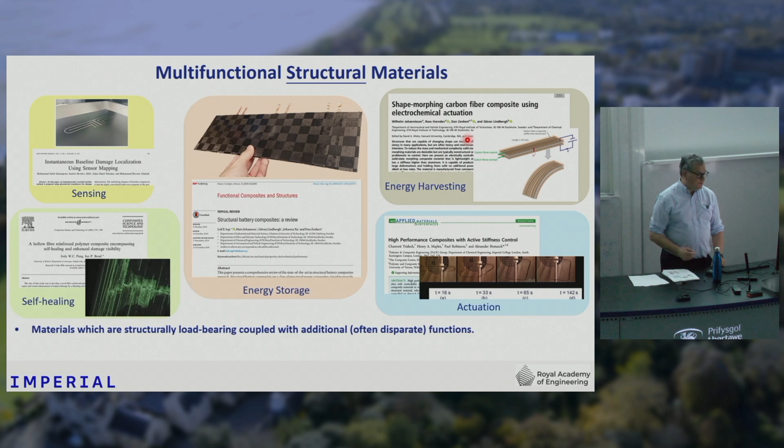What I ought to reinforce first is that we're really going beyond this idea of smart materials and smart structures. There's a lot of work that's been going on for decades embedding sensors or batteries into structures. For instance, this is some really nice work done by the US Navy, going on for about 15 years, looking at embedding lithium-ion batteries into aircraft structures - these are UAVs - as a way of making more efficient structures.

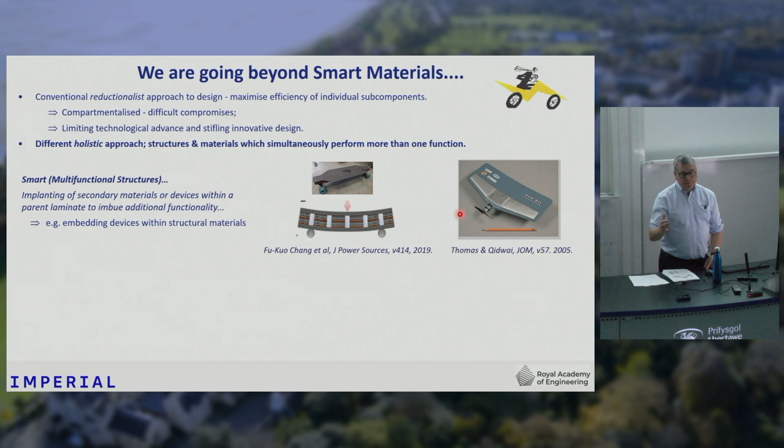So this idea of embedding devices, embedding batteries into a composite structure, is actually relatively mature. But what we're doing is really going beyond that. We're not trying to embed a structure, we're not assembling a product out of a monofunctional structure and a monofunctional battery - we're actually trying to imbue the same material to do two things simultaneously.

For instance, the carbon fibers that we use within our material carry structural loads - these are aerospace grade carbon fibers. But those same carbon fibers have lithium ions intercalating into them and out of them to add a battery function. So the technology and the challenges with this are much more immense than for just embedding a battery, for instance.

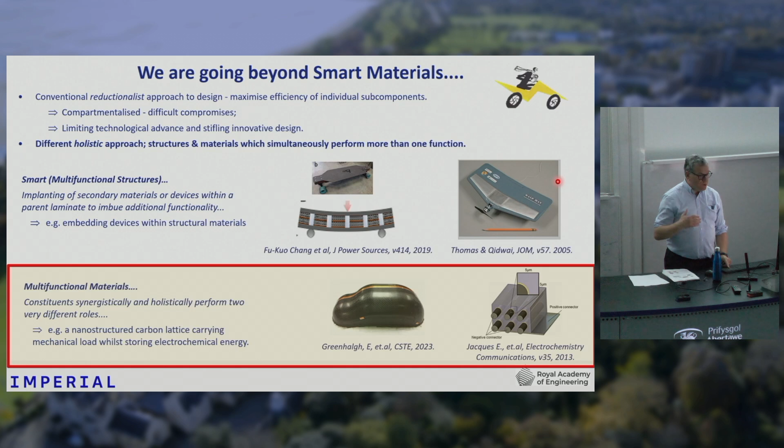But the rewards from doing this are enormous, and I'm going to elaborate on that in a minute in terms of what achieving this idea of structural power materials is going to mean for our day-to-day lives. But to give some context to what's really driven us this way is this whole issue of sustainability, and the issue of energy storage and electrification of transport.

So if you're looking at an electric car, the issue you have is that you have a car with a number of batteries in it, but you need to put more and more batteries in to actually improve the range of the vehicle. But adding more batteries adds more mass, so you need even more batteries to do that particular journey.

If you want to double the range of the vehicle, you can achieve that with the same amount of energy by halving the weight of the vehicle. So things like Tesla cars, for instance, about 25% of the weight of the car is actually the batteries. So you're expending 25% of your energy just moving the batteries from A to B, which isn't very efficient.

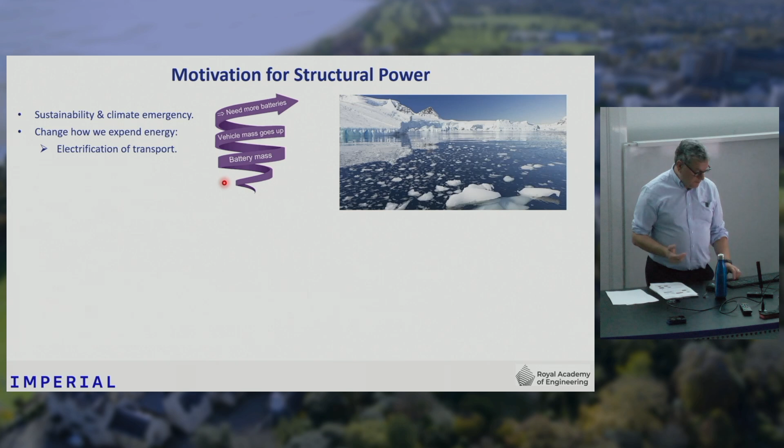It's parasitic weight. In aerospace, this is even more of a problem. There's been a really big drive in aerospace toward a net zero aircraft, a long-haul passenger plane that's not using any aviation fuel by 2050. The challenge is that if you're using kerosene in an aircraft, about 30 kilograms of kerosene is required for each passenger.

If we use batteries with current battery technologies, which have an energy density of about 250 watt-hours per kilogram, you'd need 1,000 kilograms of batteries per passenger. So that's really just not feasible.

Aerospace is a very conservative industry. If you try to get a new material onto an aircraft, you have to go through a lot of steps to demonstrate that it's airworthy. So really, we felt that we need a radically different approach to how we store electrical energy on vehicles.

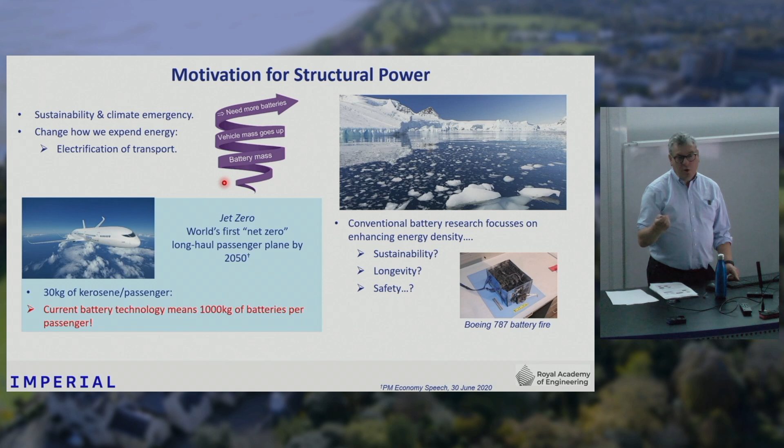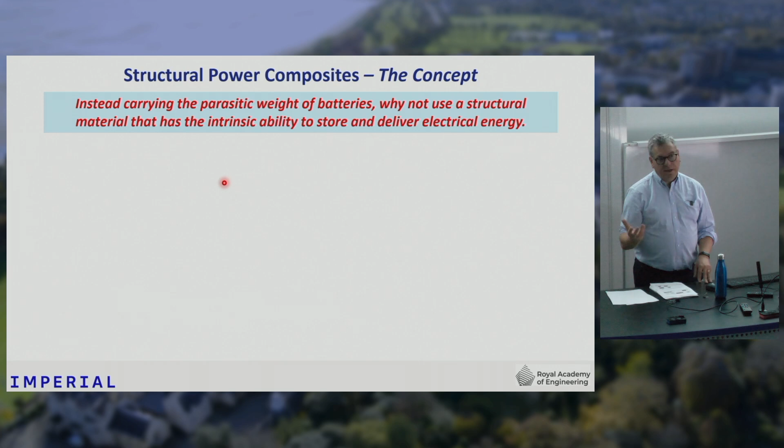Instead of having that parasitic weight of the battery, why not use the structural material to have an intrinsic ability to also store the energy? So you won't need batteries—the body of your car, the casing of your phone, would store the energy that you need for use.

We worked very early with Volvo on this concept, and they were very keen on this idea, and we've gone on to demonstrate that this technology is feasible. There's a lot of synergies here in terms of the sciences.

Although we're bringing together electrochemistry and composite mechanics, which are very different fields, there's a lot of parallels. For instance, in electrical energy storage, carbon is widely used as one of the electrodes, or both electrodes in some instances. And in structural applications, we use carbon fibers. So immediately there's some synergy there.

There's also this issue that carbon fiber composites that we use in aircraft structures are laminated structures, while batteries, again, are laminated structures. So we thought there's some synergies there that we could try and exploit with this technology.

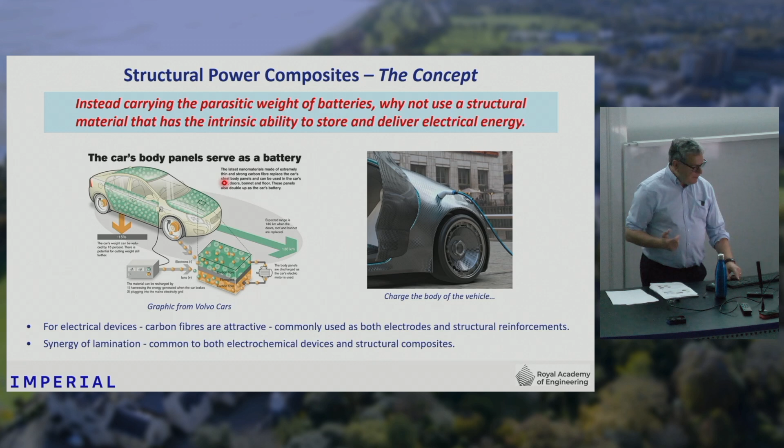So let me share with you our aspiration for what we hope this technology will achieve. First of all, as with any sort of lightweighting technology, the idea that you could have a material that does two things simultaneously is going to give us lighter vehicles, more spacious vehicles. So what we're trying to convey here is that you no longer need this big pack of batteries in the car—there's a lot more space in the vehicle.

So what we're showing here is you're charging the vehicle. In lots of applications, this is going to give us lighter weight, reduced volume, more spacious applications. But we thought there are things here that this technology is going to offer beyond those conventional things we think about in engineering.

One aspect we recognized is that a lot of products, particularly portable electronics, have their actual form factor dictated by the battery. In a phone, for instance, half the volume of your phone is the battery. So if we could now get rid of the battery...

...and use the casing of the phone, which is a structural component, but imbue that with the capacity to store energy, you could now have phones as thin as credit cards because you no longer have to think about where you put the battery. That was something we thought would be very attractive from a consumer point of view—suddenly it opens up this space where you can make very slender devices.

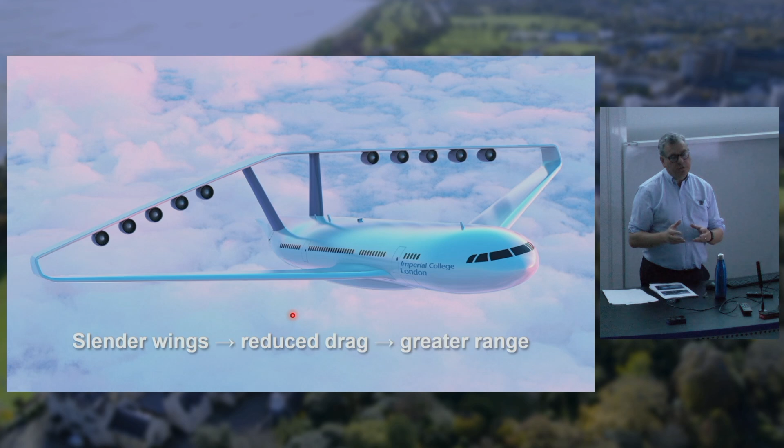As an aerospace person, I was immediately thinking about what we can do in aerospace with this. Where we started was recognizing that at the moment aircraft have hollow wings, and the reason is you need to store fuel there, be it kerosene or batteries. But if the structure of the wing itself or the fuselage stored the energy, you wouldn't have to have hollow wings anymore. You could go to very thin wings, reduce drag, and improve the efficiency of the vehicle. But if you start moving to thin-winged aircraft, you run into aeroelasticity problems.

So the whole aircraft would need to look different. You'd have to start looking at box wing type configurations, for instance. One thing we recognized with this technology is that it's not something we can just retrofit onto an existing product. This needs a blank sheet of paper. It's such a fundamentally different way of using structural materials that you have to rethink everything from scratch.

As we thought about how we could use these materials, we saw that it offers localization of power storage, energy storage. Rather than having the power source remote from the actual usage, you have an opportunity to bring everything closer together. For instance, in the aircraft cabin, when you're sitting watching your entertainment screen, the energy driving that is actually coming from the engines of the aircraft. And if you took away the panels in an aircraft, you'd see enormous looms of wiring.

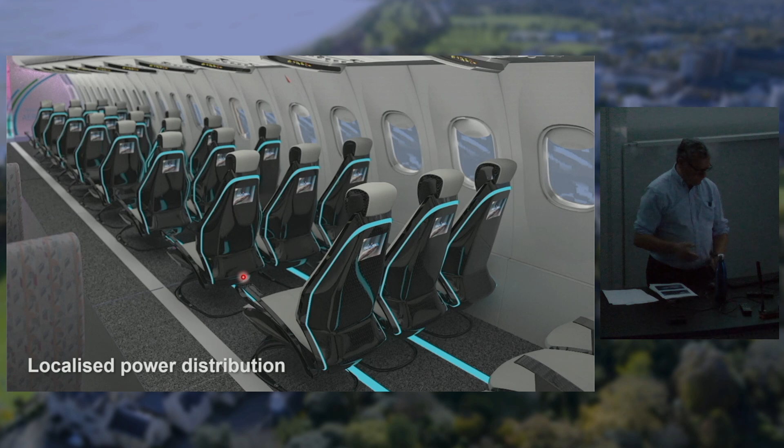In the wider context, we started thinking about how this could go beyond transportation - one thing we thought about was infrastructure. If you're looking at using solar panels on your house, at the moment you have to have a great big bank of lead acid batteries in your basement to store all that energy. But what if you actually made the bricks of your house into batteries? The walls of the building would actually store the energy captured by the solar panels. This is where we saw this technology going.

So this is all the aspiration - we're nowhere near achieving these things yet, but we're trying to think about where this technology could take us if we overcome the challenges. And I'm going to talk a lot about what those challenges are.

So let me focus on that cabin application I spoke about. This is a paper we published 2 or 3 years ago where we looked at an A220 aircraft, considering using the floor panels to store energy. We started to think about what levels of performance we could achieve in the next 5 years or so.

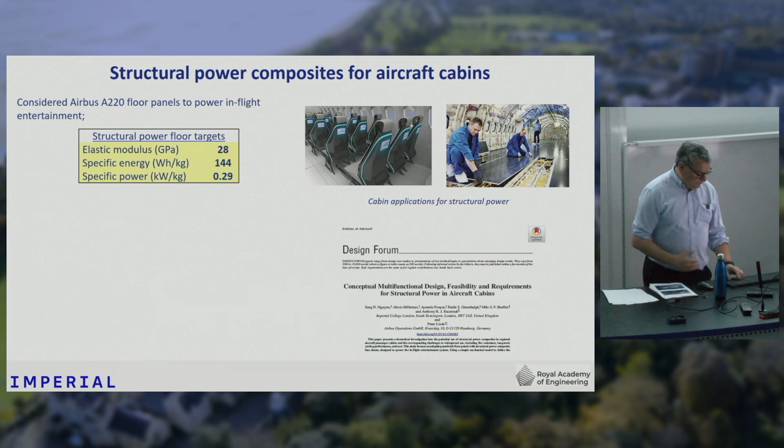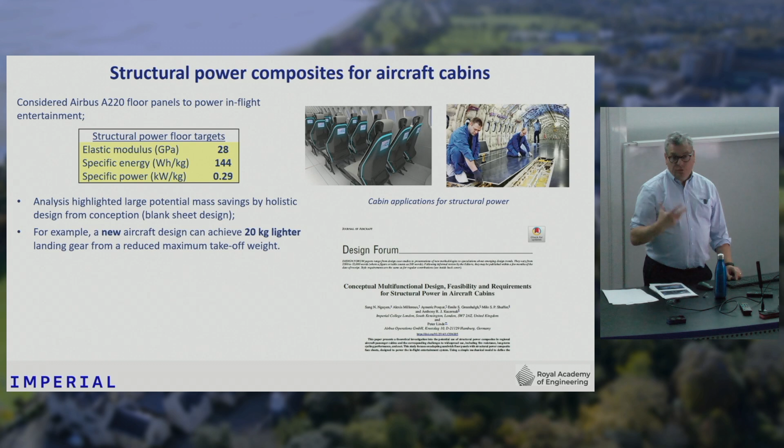Taking those numbers, we started redesigning the cabin, looked at all the electrical systems and demands on that system, and identified that if we took an A220 and put this system into the vehicle using those performance targets, we'd get a weight saving of 260 kilograms per aircraft - equivalent to about 500 litres of space saved.

And we then translated that into CO2 reduction. For that vehicle, it would result in 280 tonnes per year of CO2 reduction, which is about equivalent to 1% of the annual CO2 emissions of a single A220 aircraft on its typical flight schedules. So this was very attractive, and we think cabins is one of the early adoption routes we see for this technology.

We've also done some other studies trying to understand how this technology could be applied to other areas in aerospace. What we've been trying to do here is identify the target performances we need to achieve in our materials to actually offer a benefit, and that's helping us identify what routes we need to take this technology.

So there's a lot of interest at the moment in these types of vehicle, these autonomous air taxis. The idea is you could take one of these air taxis to fly from City Airport, in the east of London, to Heathrow, in the west of London. If you took a taxi, that would probably take about 2 hours, but if you flew, it would take about 15 minutes. These air taxis hold about 4 people, they don't have a pilot, it's all autonomous. Various companies like Vertical Aerospace and Airbus are developing these types of vehicle.

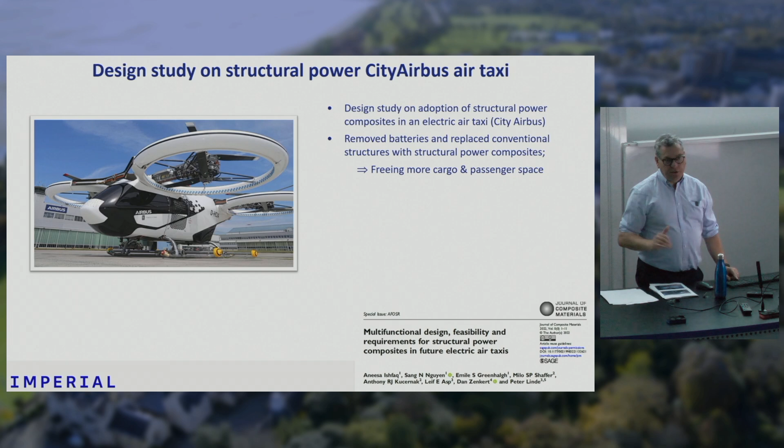To put that another way, if you want to fly from London to Manchester, which is 240 kilometres, conventional batteries would need an energy density of about 370 watt-hours per kilogram. That's not a level we're going to achieve in the next probably 5 or 10 years. For structural power material, you need less than half of that, 170 watt-hours per kilogram, which we haven't achieved yet, but it's within reach. So the attraction of this technology is that it will help us achieve electrification of transportation without needing the astronomically high energy densities we need for batteries to achieve that.

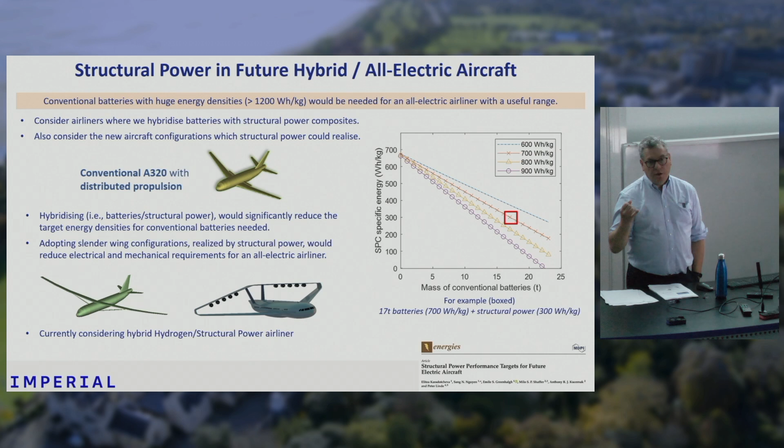So the idea, for instance, is that you'd have a hydrogen-powered propulsion aircraft that powers the engines, but then you'd use structural power materials to run the cabin and things like that.

but they are very sluggish because they work by chemistry. There's a chemical reaction going from charged to discharged, and so thermodynamics becomes very important for batteries. So although batteries can store a lot of energy, and fuel cells are even better in terms of how much energy they store, they're very slow at delivering that energy.

The other end of things are capacitors, so electrostatic capacitors, the sort of thing you might have used at school. Those deliver energy really quickly. They have a specific power on the order of 10 to the 5, 10 to the 6 watts per kilogram, but they can't store very much energy. So those capacitors tend to be used in things like energy weapons or lasers, where you want to deliver energy really quickly.

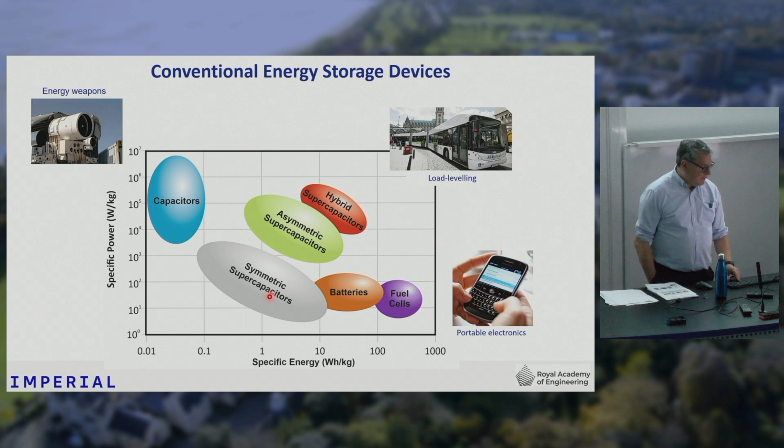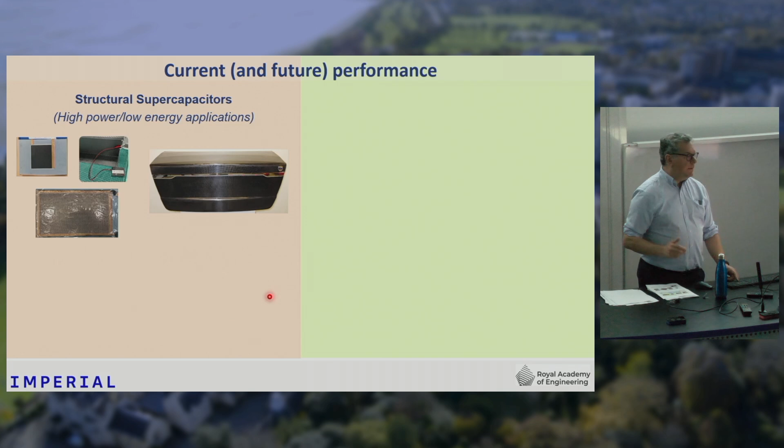So we focused on supercapacitors, and as you'll see, we've done a lot of development—we've taken this technology forward quite considerably. But while we were working on this, we started speaking to people in Sweden, at KTH and Chalmers, in Stockholm and Gothenburg, and they've started working on structural batteries.

So they're a little behind us, and they've started developing that type of technology. I'm going to focus on structural supercapacitors because it's what we're doing, but there's a lot of challenges associated with both these devices which is common to both. And so the things that we deliver with our technology are going to help the people in Sweden with their developments.

So just to give you an idea of where we are: a conventional supercapacitor will store about 5 watt-hours per kilogram and has a power density of about 5 to 10 kilowatts per kilogram. We're sitting at about 1.4 watt-hours per kilogram and 1.1 kilowatts per kilogram.

So we're not as good as a conventional supercapacitor, but we have a material that you can build a table out of, for instance, which you can't do with conventional batteries or supercapacitors. This is where we expect to get to over the next few years, pushing up the power and energy density, but our material also has mechanical properties.

So this is the Young's modulus and shear modulus of our material, and it's getting towards what you get for a conventional composite. The battery technology has much higher energy density—they're currently at 45 watt-hours per kilogram. If you remember, a conventional lithium-ion battery is 250 watt-hours per kilogram, but this is increasing rapidly.

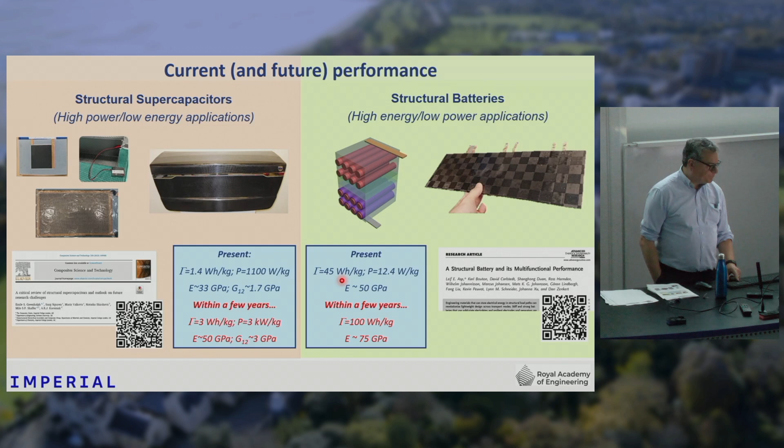So let me explain a bit about how our devices are assembled. Essentially, for a conventional supercapacitor, you have two plates which have very high surface area, and those are electrically conductive. Then you have a separator layer which is electrically insulative but allows ions to move through the material.

Between those two plates you have an electrolyte, consisting of a liquid that has ions in it—cations and anions. When you charge the device, you force one set of charges to move to the positive plate, the other set to move to the negative plate, forming what's known as a double layer. Because you've got very high surface area and the charges are very close together, you get very high energy storage compared to a conventional electrostatic capacitor. So that's a conventional supercapacitor.

What we've done is we've taken carbon fiber fabrics, and we've recognized that carbon fibers don't have very much surface area, so we've done stuff to them to increase the surface area—I'll talk a bit about that in a minute. We have current collectors, because although carbon is electrically conductive, it's not as good as something like copper or aluminium, so we have to put a current collector on there to help with that.

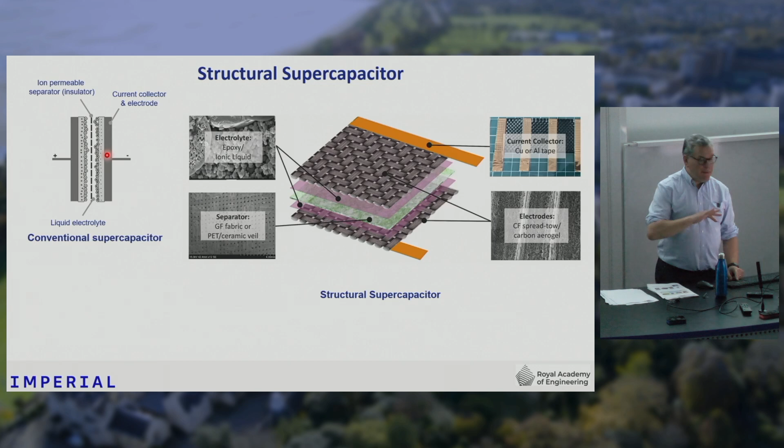And then we have a separator layer, which is either a glass fiber fabric or some sort of non-woven ceramic veil. And so that allows us to produce the devices.

So let me talk a bit about the difference between supercapacitors and batteries and sort of explain the different research challenges associated with those.

Supercapacitors we felt were a more low-hanging fruit in terms of this whole idea of structural power. There were some big challenges with batteries that we were worried about.

Supercapacitors, you tend to use them where you want high, rapid delivery of energy. So things like if you suddenly lose power in your laptop, there's a supercapacitor that kicks in and provides an emergency power source to power down your computer. It can be used for capturing energy, like regenerative braking, things like that.

So it's a technology that's not as big as battery technology, but it's certainly a stepping stone towards what we're trying to achieve. So giving you a comparison,

Lithium-ion batteries give high energy but low power. Supercapacitors are the other way around, low energy, high power.

As we're all familiar with conventional batteries in your phone, they have a limited cycle life. Your batteries die after a few years' use. A lithium-ion battery is on the order of 1,000 cycles. And that's because you're essentially doing some chemistry - when you charge and discharge, you're actually changing the chemistry of your material.

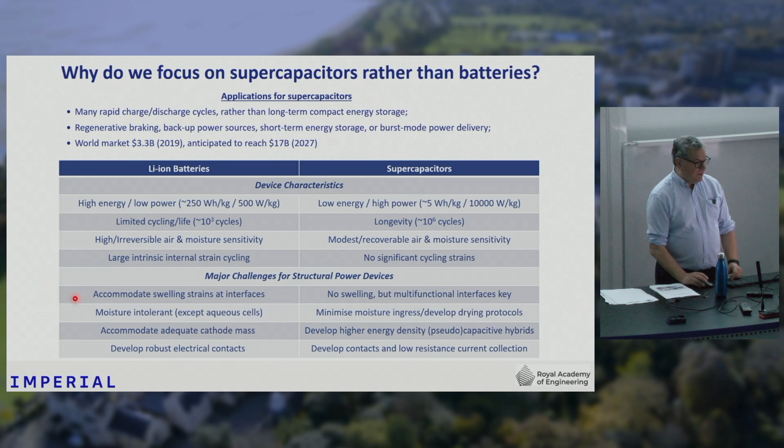So in terms of research challenges, those charging issues - in batteries, the swelling and contraction you get are going to offer challenges in terms of managing the strains that can develop in the material and potential damage that's induced.

But for supercapacitors, that swelling is not a problem, but the interfaces that we develop - and I'll talk a bit about that in a minute - those become important.

Batteries are very moisture intolerant, while it's less of an issue for supercapacitors. So what becomes the research challenge in batteries is actually having enough active material in the device, while for supercapacitors, we're trying to find ways of getting higher energy densities in the material.

In batteries, you're looking at having robust electrical contacts, but in supercapacitors, because everything's driven by how quickly you can deliver the energy, then the electrical resistance of the material becomes really important. And so what we're striving to do with supercapacitors is reduce the electrical losses in the current collection.

So I'm now going to talk about the different themes of the research that we're doing.

And in developing this research field, the nice thing about working in this area is that there's a huge amount to be done. We're not filling in gaps, as with often conventional research areas. We've got this whole empty field that we're trying to build up.

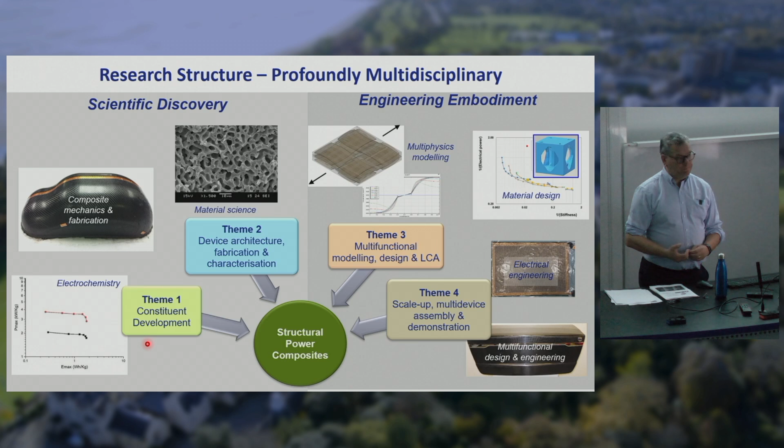Before I talk about those themes, I just want to flag up a paper that we recently published, I think it was last year, where we looked at all the literature on this area. This really gave us a lot of insights that I'm going to touch on as we talk through the presentation.

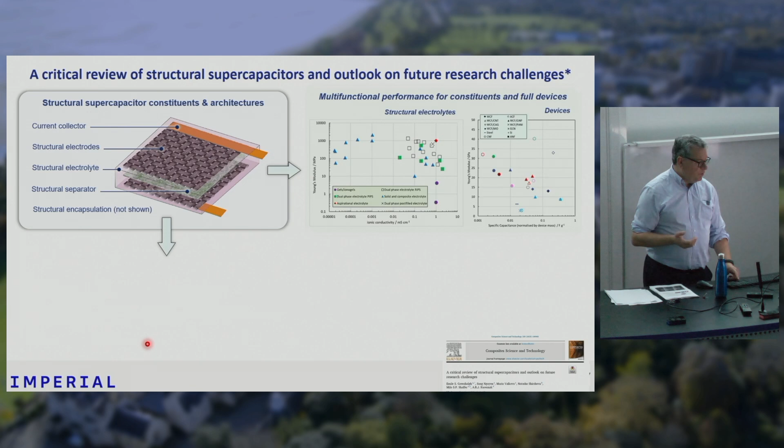We looked at all the literature that was out there in terms of performance of the electrolytes and the devices, so this is looking at capacitance against Young's modulus, for instance. We also looked at some of the engineering issues, like where are things with the modeling, where are things with current collection. That really came up with a series of recommendations for this technology that I'm going to be touching on as I go through these 4 different themes.

But to sort of help break this talk up, I thought maybe at this point I could field any questions you have on what I've covered so far, before I dive into the individual themes.

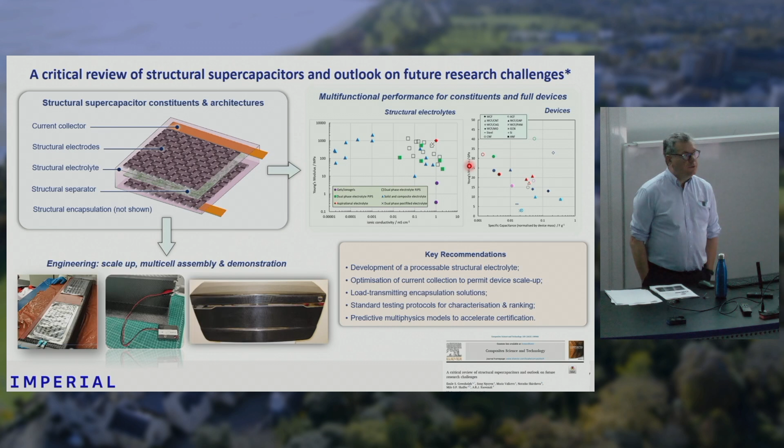So I was just wondering, obviously when you design a composite, there's normally a lot of rules in the design you have to follow to get the directional spread. There's also a lot of challenge when you make composites, they're quite fussy things to make. Does this sort of technology add significantly to those challenges?

It does, it does. Working in composites, we have to worry about balancing the layup. You choose a stacking sequence where you've got particular modulus, elastic requirements. You have to make sure the stacking sequence is mirrored at the midplane, and ensure you've got the same number of angle plies in the plus or minus direction, so you end up with a laminate with 0 B terms. So that's the mechanical aspect.

The problem with structural power materials is that they're also batteries or supercapacitors. A battery has an anode and cathode, which are different, so if we just stacked an anode, a separator, and a cathode, we'd have an unbalanced laminate. So we're starting to think about things like 3 electrode cells, where we have 2 anodes and a cathode in the middle. It's effectively 5 layers with the 2 separators as well, which isn't ever done in conventional batteries, but it's something we think we might have to do just to deal with those balancing rules.

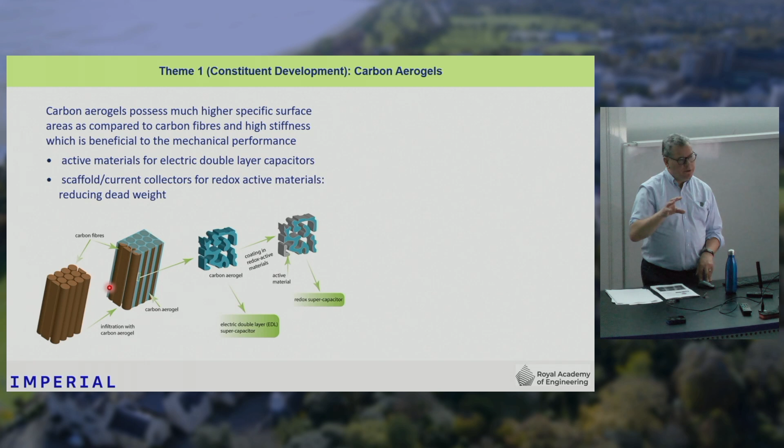But what we've really moved on to is carbon aerogels. To explain what carbon aerogels are, these are effectively amorphous nanocarbon foams. It's produced by infusing a precursor into the carbon fiber fabric, using conventional aerospace grade carbon fibers, then you pyrolyze that to turn it from a resin, effectively a phenolic resin, into a carbon aerogel. This image shows a carbon fiber about 7 microns thick, and the carbon aerogel within the matrix space between those layers.

Carbon aerogels are used widely in the conventional electrochemistry field for supercapacitors and even batteries. The problem is it's really brittle, but the nice thing about using carbon fibers is they act as a scaffold. So rather than having a powder, the carbon aerogel is supported by the carbon fibers, and we can produce laminates. I think the largest we produce is an A4 size laminate, which is continuous carbon fiber with a continuous aerogel throughout it.

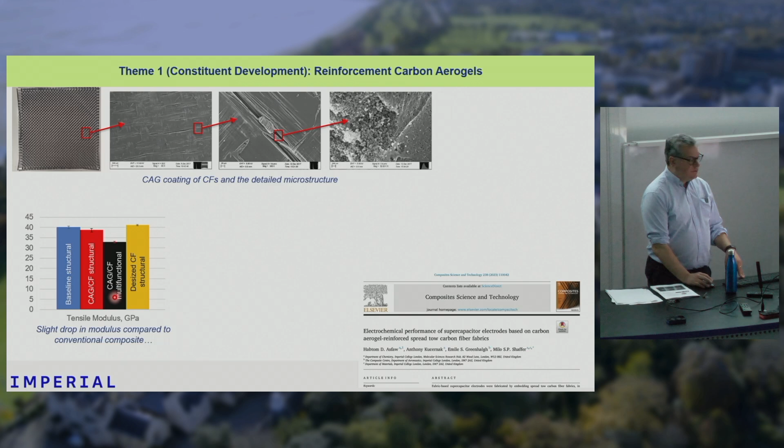This is a structural resin with carbon aerogel on the carbon fibers. We're maintaining the same mechanical properties, modulus. If we use the multifunctional matrix, we get a drop because the multifunctional matrix, as I'll show you, is much softer. And then we did a desized version as a sort of control.

However, the problem we've encountered, and which is what we're addressing at the moment, is that the carbon aerogel process damages the carbon fibers. So we're now exploring how we can get around that problem.

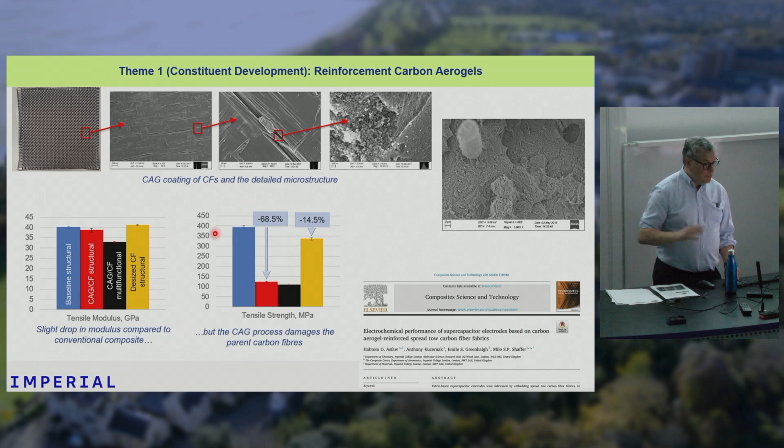So we do have other strategies for producing electrodes. We're looking at using carbon nanotubes, for instance, putting those onto the carbon fibers as a way of improving the electrode development. So I would say on the structural supercapacitors, the actual electrode development is quite advanced.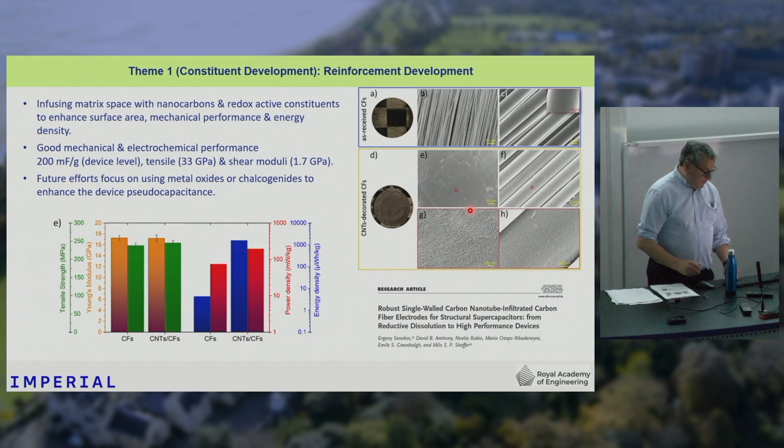But where the really big research challenge is, is on the electrolyte. The nice thing about the carbon aerogel is that we've identified it's actually stiffer than a conventional epoxy. The carbon aerogel has a modulus of about 25 gigapascals, while a conventional epoxy has a modulus of about 5 gigapascals.

So we actually think the aerogel could be used to enhance mechanical properties of the composite if we can get rid of this degradation problem. And so that synergy there between mechanical and electrochemical is really attractive. It offers us a way of actually getting this technology to go beyond just a rule of mixtures.

With the electrolyte, this is more challenging because we want a material that's mechanically good. It's rigid, so it can carry mechanical loads and transfer loads between the fibers, but it's got to allow the ions to flow between the fibers. Conventionally, electrolytes are soft, they're liquids or even gels, and they allow ions to flow. If you have a rigid material, it's difficult for those ions to move.

So the approach we've taken, and we have some aspirations in terms of performance we want to achieve. We want the Young's modulus of the electrolyte to be beyond a gigapascal, and we want the ionic conductivity to be beyond 1 millisiemens per centimetre.

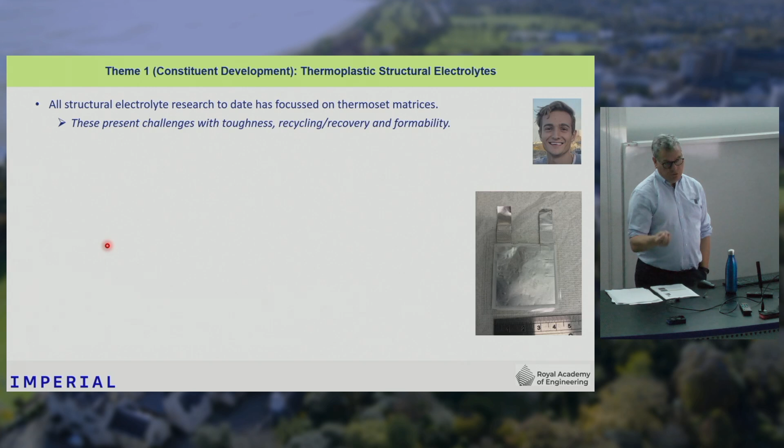The challenges here are that the processing temperatures for conventional high performance thermoplastics are enormous, 350 degrees C. So those high temperatures are going to be problematic in terms of producing a material which has functions, because a lot of those functions are going to be damaged by excursions into those temperatures. Producing that biphasic structure in a material that you're processing at those temperatures is also going to be very challenging.

And thermoplastics, although they're quite tough, they tend to be very difficult to bond things to them. Things like polyethylene is a thermoplastic that's notoriously difficult to bond things to. So if we want to assemble a device where the layers are bonded together, that's going to be challenging. So we have various strategies that we're looking at to try and achieve a thermoplastic structural electrolyte.

The main driver here is that thermoplastics can be processed quickly, so we could get this technology into applications where manufacturers want things made quickly, like portable electronics and automotive applications. It also means there's a potential route to recycling these materials, because thermosets are very difficult to recycle, everything's locked together, whereas with thermoplastics you can melt them and recover the constituents. That's one of our motivations for going down this route of thermoplastic structural electrolytes.

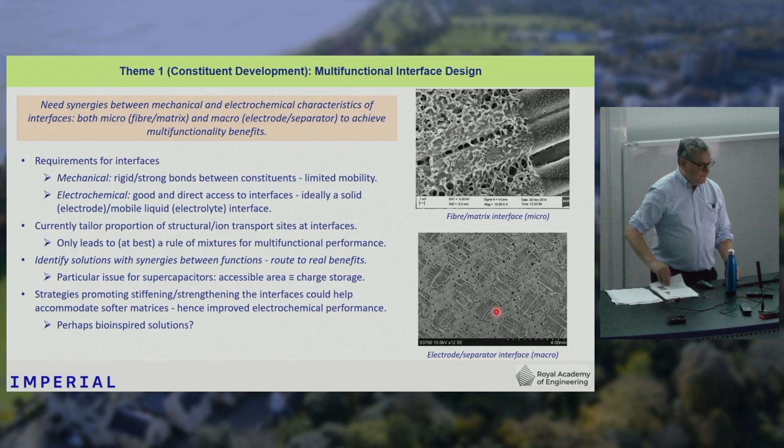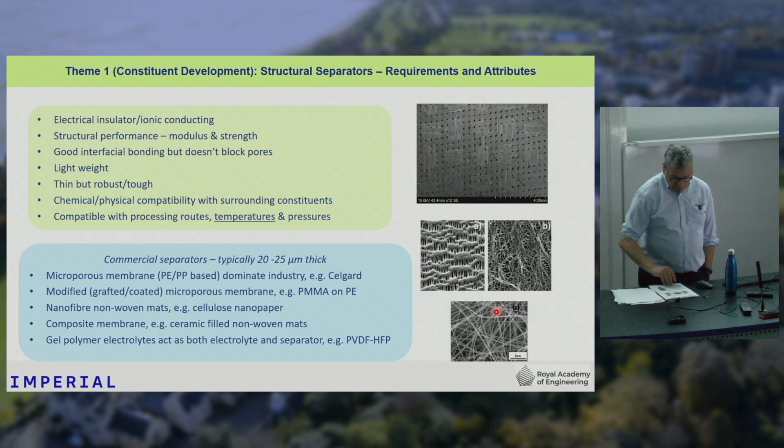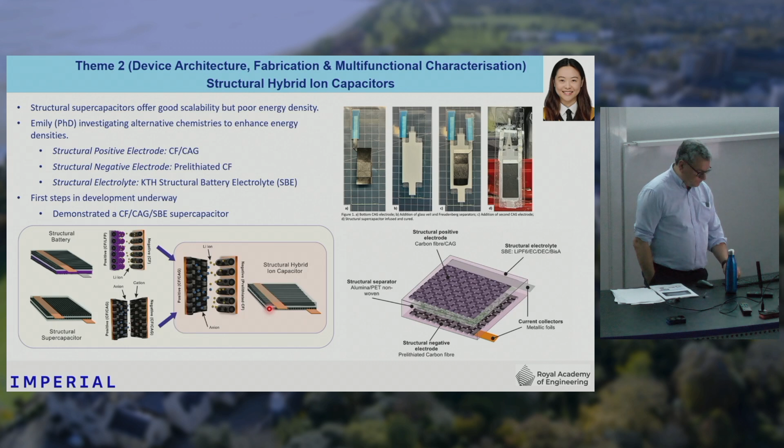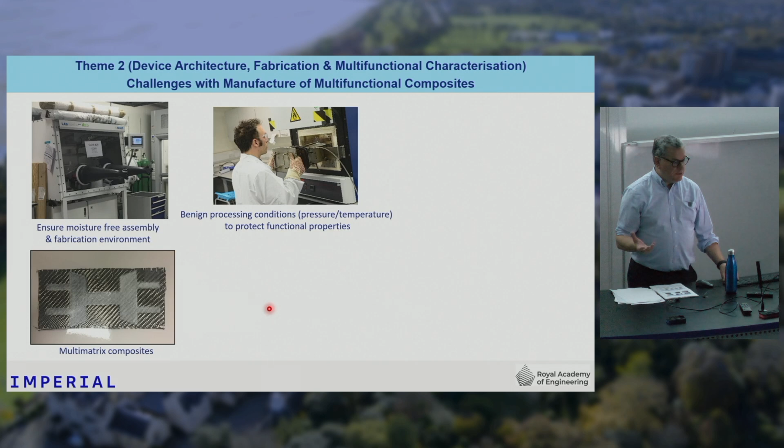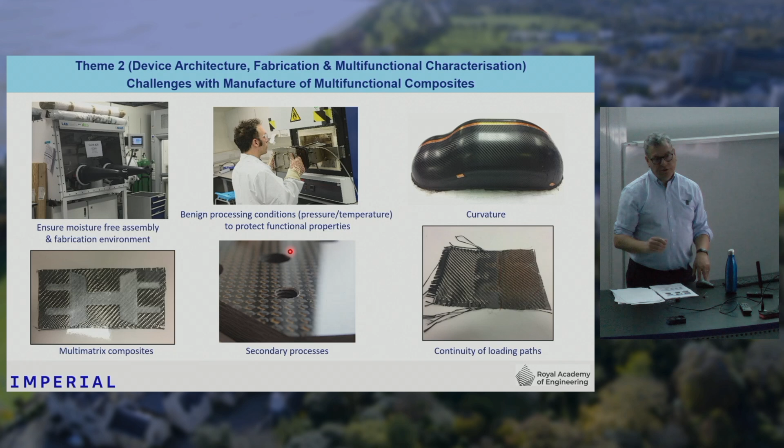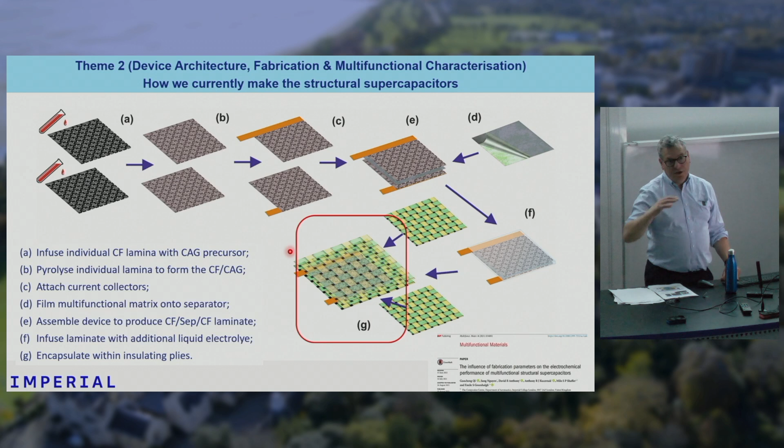That final device has carbon fiber layers which are electrically active, so we can't just leave that out on the desk. It needs to be encapsulated. The next stage is the encapsulation of that device within an electrically insulative layer.

So we've been working on the fabrication issues and we've met some challenges. The really nice microstructures we can produce in the bulk production of the structural electrolyte, if we try and put that into the device, we lose that microstructure.

So to address that point, we've got a project, an EPSRC award, which we started about a year ago, with Bristol and Durham, called Realising Structural Power, and this is addressing the manufacturing challenges. We have Natalia Shirshova at Durham, working on development of the structural electrolyte, but in partnership with that, the group at Bristol, Dmitry Ivanov, is working on how to fabricate these devices. So it's not just about developing the matrix on its own, but making sure that matrix is processable. And from the Imperial perspective, we're working on current collection and encapsulation issues associated with this. So all these things feed into each other in terms of producing a final device.

So moving on to characterization, let me talk you through how our technology has developed. We've taken this Maxwell supercapacitor as our baseline conventional device, and that has an energy density of 4.7 watt-hours per kilogram and a power density of 4 kilowatts per kilogram.

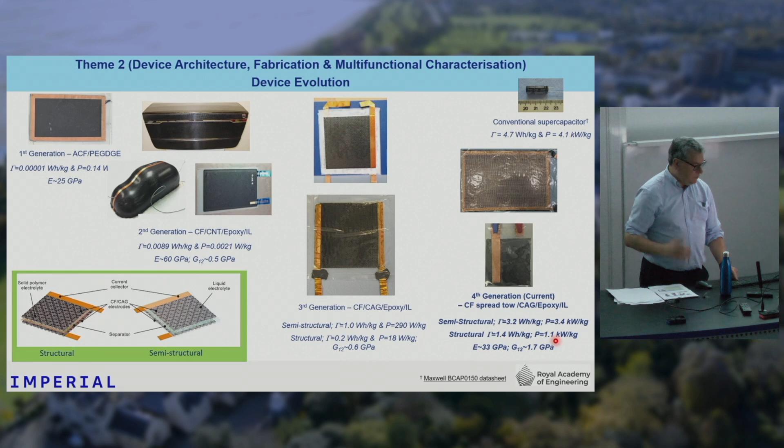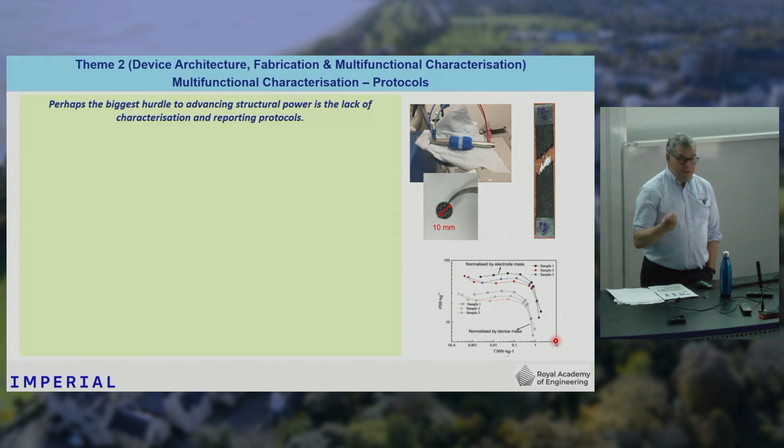So in developing these materials, we've tried to understand what's the landscape for the work going on across the world. And in putting that review together that I showed you, one of the things that came out is that there are no protocols, no testing standards for these types of material. And this is actually the biggest hurdle to get industry to adopt this technology.

So the problem is that if you're trying to characterize these materials' electrochemical performance, you use this little 10mm disc, either a coin cell or what's called a Swagelok. You build your device and characterize that at that very small scale. If you want to do a mechanical test, you need a specimen about 10 centimeters long, a centimeter wide — a different scale. So the problem is that if you're claiming your material is multifunctional, but you've characterized the electrochemical performance and the mechanical performance on different size coupons, it's not really credible that you can say this is the multifunctional performance of your material. That's something we're trying to address.

What feeds into this is that ideally we'd like a test coupon that we can use for mechanical testing and at the same time do electrochemical testing. No such configuration exists at the moment. So this is part of the problem with the protocols.

And then on the reporting, this is something that's opened my eyes a bit in terms of electrochemical reporting. If you look at the headline numbers reported in electrochemical journals in terms of performance, everything's normalized by the mass of active material or the mass of the electrode. But from the end user point of view, where you've got a piece of material on the table, you want to know how much energy you can store in that — you need to report that in terms of device-normalized data, so the mass of the device. That's something that needs to be addressed in terms of reporting this technology.

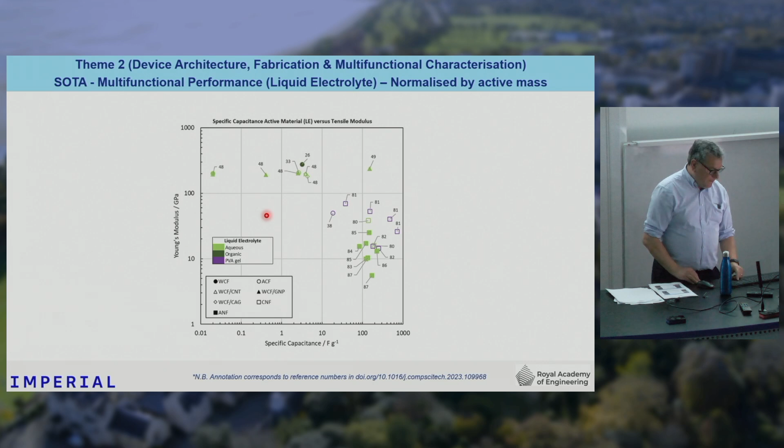But this shows some of the different work done in this area, the different types of chemistries people have used. And this shows some of the data we've produced with the carbon aerogel, which looks to be one of the best performing devices out there.

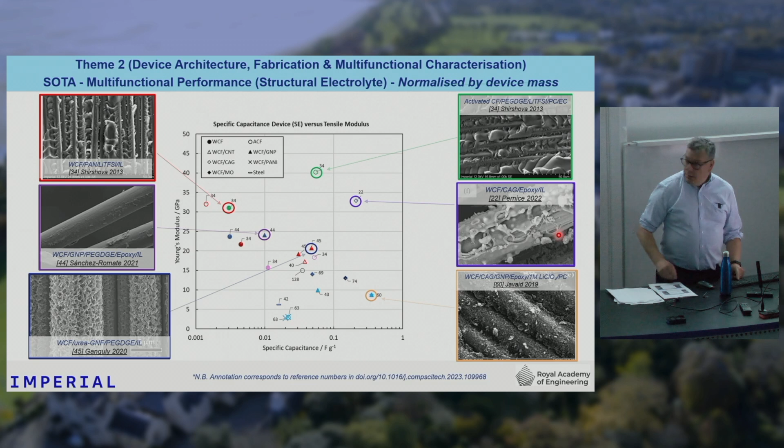Let me now move on to probably the theme most interesting to you, which is the modeling aspect, theme 3. This is something we're really focusing on at the moment because we see it's vital to take this technology forward. The way we're addressing this is by looking at modeling at several different scales.

We're looking right down at the micro scale, dealing with almost molecular level behavior, like the storage of charge at the electrochemical interface. We're also looking at multi-physics modeling to capture mechanical and electrochemical behavior in the same type of modeling code. And there's a design aspect as well, how do you design a product with a combination of conventional composites and multifunctional materials.

So I'll touch on each of those levels. One of the first things we started embarking on, having worked with the chemists, is that everything they do is very much experimental. They mix the constituents together, produce a microstructure, change the performance, it changes the microstructure. But we never really knew what the perfect microstructure was that we wanted for our device. So we thought modeling would be the approach to achieve this.

So we want to produce a representative volume element of our material, and that volume element has to have a functional requirement, allowing ions to move, say, horizontally through the material. But at the same time it's got to meet a structural requirement, it's got to carry mechanical load. The idea here is that you would have this optimized representative volume element that you would essentially build your electrolyte out of to produce your structural power material.

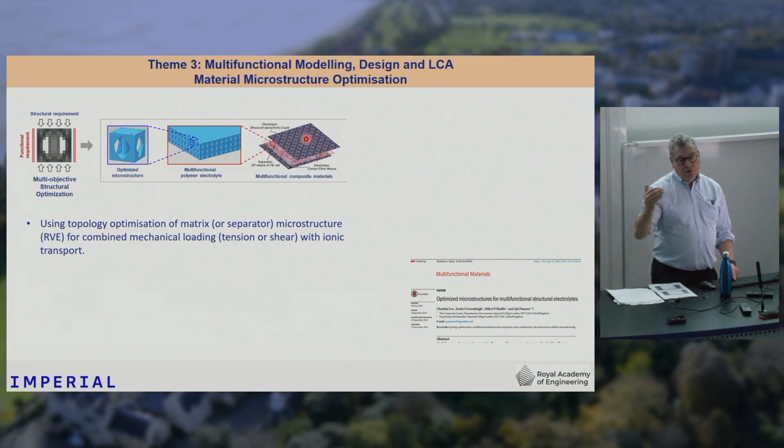We used topology optimization to come up with the optimum motif for our microstructure, to give us a balance between mechanical loading, in tension or in shear, and maximizing ion flow. The way we did this was to look at different volume fractions of those two phases, the ionic phase and the structural phase, but also different weight fractions in terms of the functions. We plotted this as a Pareto front, showing either very high values, using the reciprocal of each of those parameters.

So this end shows high electrical ionic conductivity, this end shows high mechanical properties. We've got this Pareto front, which shows the solutions that give us, for a particular weighting between those two functions, the optimum solution, the lowest weight solution.

We compared that to a well-known structure called a Schwarz-P structure, which is recognized as providing a balance between transport and structural aspects, but it's an isotropic configuration, so it has the same transport in all directions. What we're interested in is only maximizing transport in one direction and mechanical performance in the other direction.

Now, what I thought was really exciting about this was once we'd done the topology optimization and come up with these solutions, we 3D printed them, as shown here, and then characterized those in the lab. We looked at the mechanical properties and the electrochemical properties, albeit at a much larger scale. These solutions were scale independent, and we were not really capturing some of the micro scale physics that could happen.

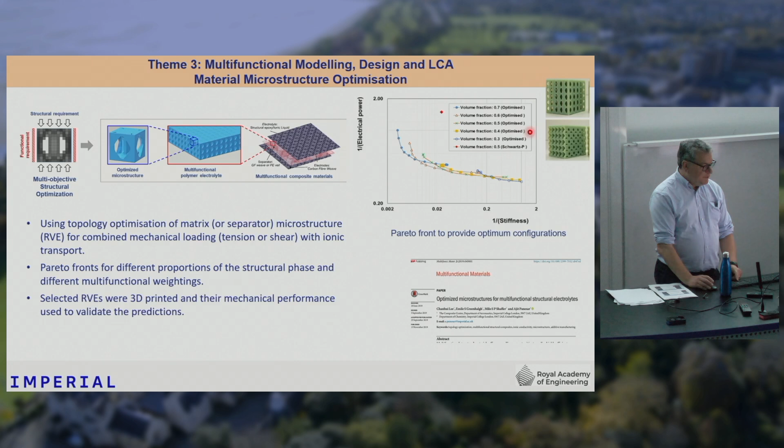And that allowed us to demonstrate that these solutions were credible. So this was an exciting piece of work that we're really taking forward now, and we've started to look at the concept of doing multi-scale topology optimization.

So if you consider one of those unit cells shown here, this is one of the unit cells that's optimized for shear loading. If you start to scrutinize that microstructure, there are some regions that are seeing high direct loads and some regions that are seeing high shear loading. So what we're able to do is have a library of different motifs and then implant those into this larger scale motif to give us an optimized structure.

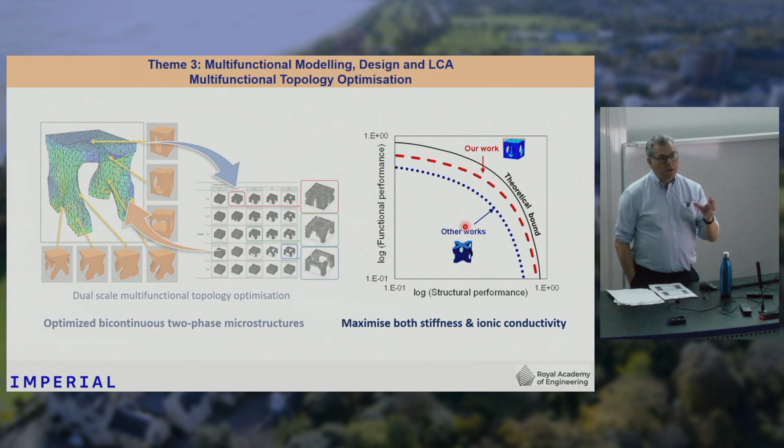Using this, we're able to actually demonstrate, and I could show to the chemists, this is the microstructure I'd like you to make. And so that really is helping us move this technology forward because we know what we need to achieve in terms of the structure of the electrolyte.

Let me go up to a larger scale now and look at the sort of multiphysics modeling that we're trying to achieve. The idea behind this is that in order to get to the point where we can start to design our products using models, we need to have modeling tools in place. And we recognized early on that one of the first steps is modeling the consolidation process.

Here you've got two electrodes and the separator, and then when you're consolidating those, the video should start. Then you're starting to squeeze those together and we start to see this effect, for instance, of nesting of the smaller weight tow into the larger tow here. So we're able to predict the microstructure of our material during processing.

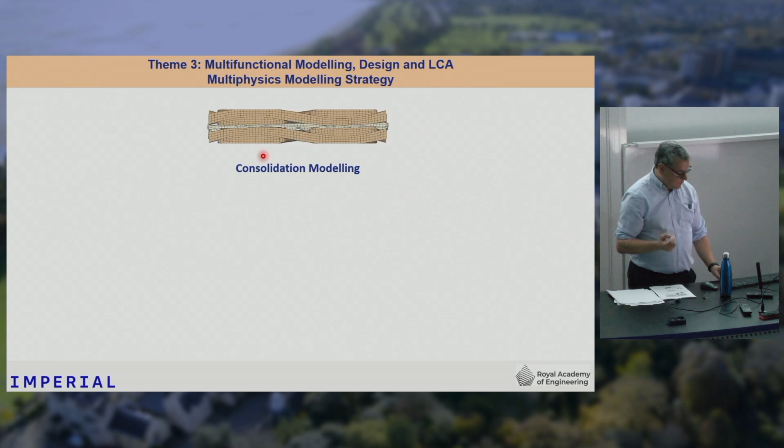And then we could implant that into an Abaqus model of the mechanical properties, which we show here, where we can vary things like volume fraction of the fibers and matrices to give us a prediction of elastic performance. And we also can take that model as an electrochemical model. Okay, so that's kind of where we're going with things.

Now the problem is, you do this in Abaqus and you do this in COMSOL, and ideally we'd like to have the two talking to each other. So the sort of problem that we'd like to solve is that you've got a mechanical model, you introduce damage - what does that do to the electrochemical performance? Moving that between codes is going to be quite cumbersome. We'd like to have, and I think industry would like, a single code that captures everything and allows that sort of coupling between mechanical and electrochemical aspects. So that's an aspiration we have for the modeling.

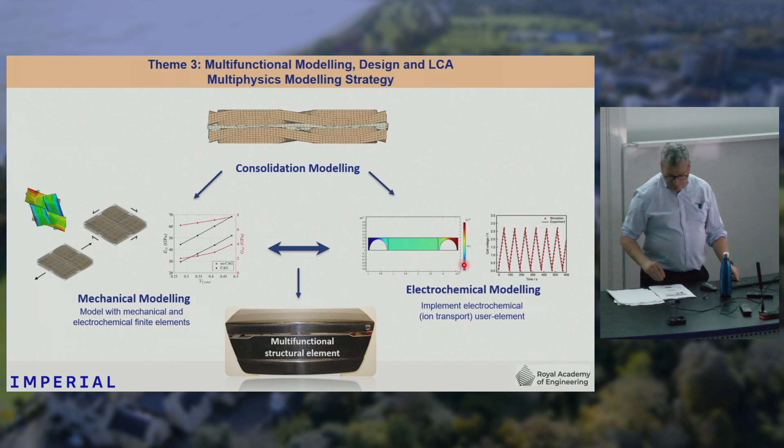And then that's going to allow us to design structural elements. So where we've taken that is we've done some elastic modeling as shown here - I'll skip over this quite quickly - and also the electrochemical modeling we're working on.

So for the electrochemical modeling, Abaqus has just introduced a battery model into the code, and we're now starting to explore using that for electrochemical modeling. As I said, one of the aspirations there is to allow for damage and things to be introduced. These are some of the governing equations, but I wasn't going to dwell on these. What we're trying to do is take that battery model and see if we can apply it to a supercapacitor model.

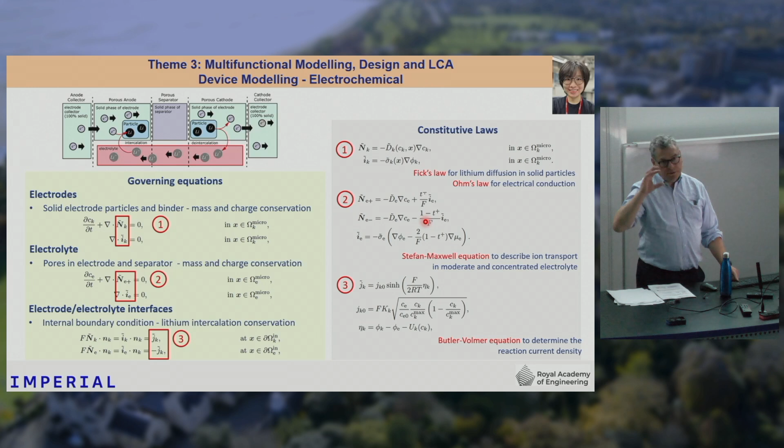And we do that by manipulating some of these constitutive laws to allow us to do that. But no one's really tried to do this before, to take a mechanical material and explore it electrochemically. And there are some challenges here from the modeling perspective that I wanted to dwell on. First of all, the length scales are quite different - so the carbon aerogel, the actual porous structure, is on the order of 10 nanometers or so.

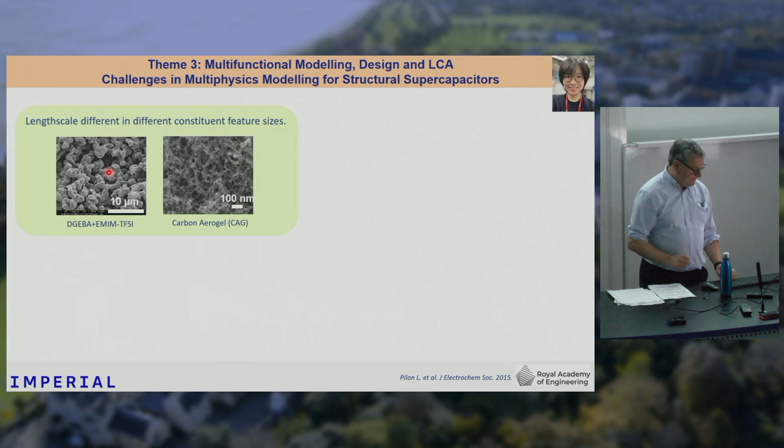So you've got a really fine microstructure in your electrode, but in your electrolyte it's on the order of microns. So immediately you've got 3 decades of difference in the length scales involved. We also have a difference in length scale in the actual physics going on.

As I mentioned before, most of the charge is stored at the double layer between the electrode and electrolyte, which is on the order of a nanometer in scale. But if you're looking at mechanical modeling of the material, it's a mesoscale problem. That's the length scale domain.

We also have an issue in the temporal domain. Batteries happen over a long period of time, so you might get away with a relatively stable model. But with supercapacitors, we're looking at very high changes in voltage with time—it's a transitory process. So the modelling needs to capture that rather than the steady state which the Abaqus module already does.

There's also a lack of 3D models. A lot of the models out there for electrochemistry are just 1D or 2D. Because of the microstructure and anisotropy of our material, we need 3D models to be able to capture that.

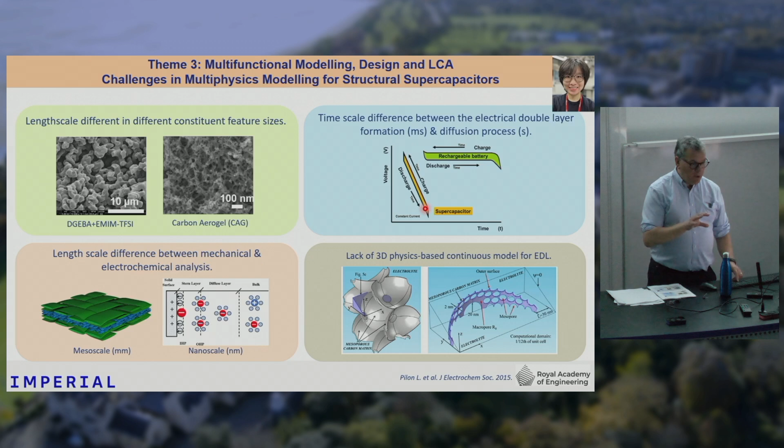So we are just embarking on this. This is Shiming, a PhD student, and she's looking at doing work at the mesoscale and macro scale, coupling the electrochemical analysis with the mechanical analysis. But if you move to batteries, you have the added complication of thermal analysis, making it an even more challenging problem. She's also looking at nanoscale modeling, to see what she can learn from the battery model to take forward.

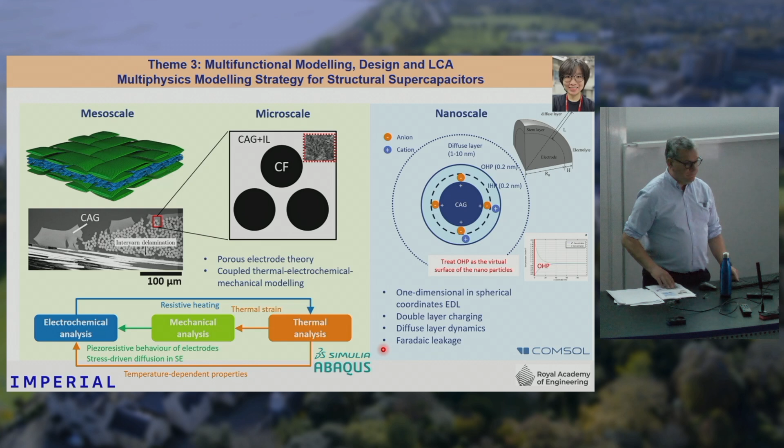Let me skip on to the final theme, which is focused on some of the scale-up issues associated with this technology.

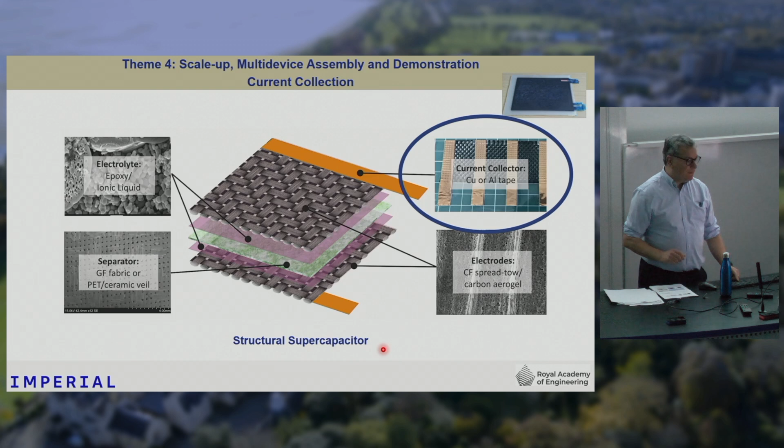Current collection is something I've touched on before, and this is quite a difficulty for us because with supercapacitors, everything is driven by how quickly you can deliver the energy. With conventional devices, we have a current collector, which is a metal film, and the electrode is added to that as a powder, with a binder holding it together.

But it's the current collector that actually supports the active material as a scaffold. So current collectors turn out to be quite heavy—they can account for about 25% of the mass of a conventional supercapacitor. The advantage with our material is that the fibers, the electrodes, carry the mechanical load, so the current collectors could be very, very thin. This is something we're exploring.

Really where this started to hit home for us was when we began to scale up our devices. We took a swagelok cell, which is this 10mm diameter device, took exactly the same material, and made an A4 sheet of material. Then we looked at two different types of current collectors: either one around the edge, or having a grid as the current collector.

We found there was a huge drop-off in performance. The capacitance, which relates to the specific energy, dropped by about half, and we could recover some of that by going to a copper grid, but that copper grid was heavy. The power was really the big problem, because the swagelok cell was giving us about 2 kilowatts per kilogram, but at this larger size we had an enormous drop-off in performance. The reason for this is electrical losses in the system.

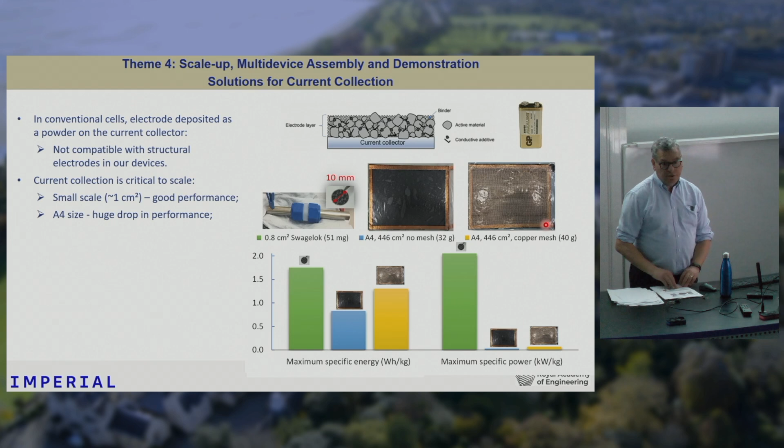So we did some work on current collection where we started to model this, just using Abaqus with the electrical model in there. We characterized the different resistivities associated with the system: there's an in-plane resistivity, a through-thickness resistivity, a contact resistivity between the current collector and the electrode, and the inherent resistivity of the current collector itself.

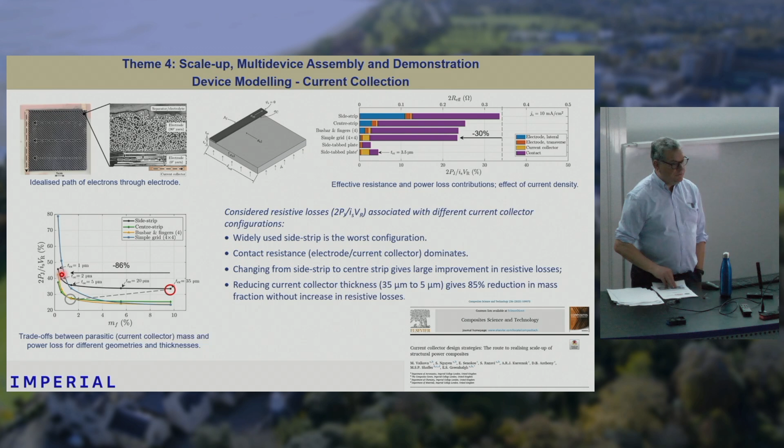The final challenge is to do with encapsulation. We've made the device, and it's electrically active, but the electrodes and the electrolyte are exposed to the atmosphere, and they shouldn't be. So we need to encapsulate it in something. The first thing we thought we'd do is sandwich it between two layers of glass fiber prepreg, but we found that the glass fiber prepreg sucked out all the ionic liquid and killed the device. So we're now working on strategies to identify encapsulation solutions which will resolve this particular issue.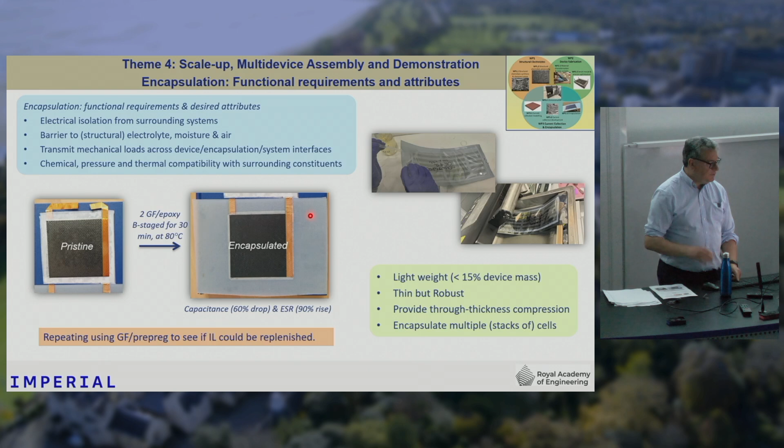So those are two aspects we need to take forward from the engineering point of view, but there's a whole issue of ownership issues associated with this technology before industry will actually take it on board. Fabrication and scale-up of these devices is going to be important.

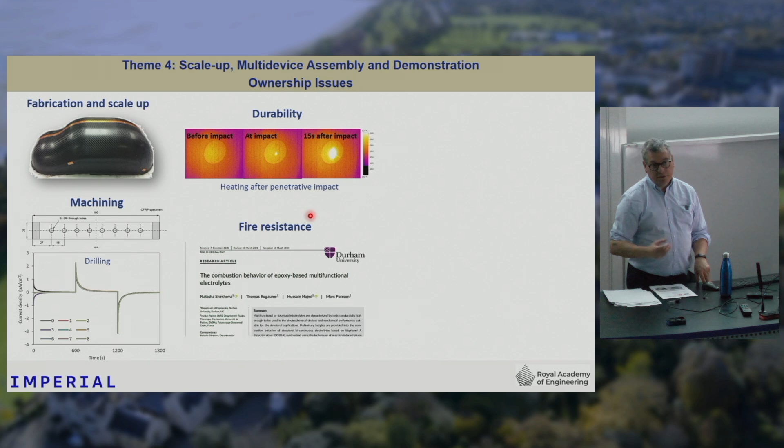Machining, as I mentioned before, drilling holes in it, which is what we like to do as composite people, but not what we want to do as battery people. There's a durability aspect: impact, fire is going to be really important. Fire resistance, if we're looking at cabin applications, is really where we see this technology going. Designing these materials to make them fire resistant is going to be important, so that's something we're focusing on.

Long-term performance, so looking at thousands of cycles and how the degradation of the material is, service temperature, and of course repair, recycling, inspection. These are all things that, as the material technology moves forward, we need to resolve to get industry to take them on board.

I want to finish on theme 4 by talking about some of the demonstrators we've made, because demonstrators, as an engineer, are a really good tool for trying to get interest from industry in these technologies. We had a project called Storage, where we were working with Volvo, and the first step in that was to embed batteries in a carbon fiber structure.

We used the plenum cover, which is essentially at the bottom of your windscreen, the bit where the leaves collect. At the moment that's just a polypropylene structure.

What Volvo suggested doing was to take the start-stop battery out of the engine compartment. The start-stop battery is used when you get to the traffic lights, the engine cuts out, and the systems on the car, like the air conditioning, are run by that battery. They took that battery out and put lithium-ion batteries into the plenum cover. They found a significant weight saving associated with that. They also had a volume saving because they no longer needed a battery in the engine compartment. But what they also found was that because you no longer had the battery in the engine compartment, you didn't need to cool the engine as much, so there was a thermal saving as well.

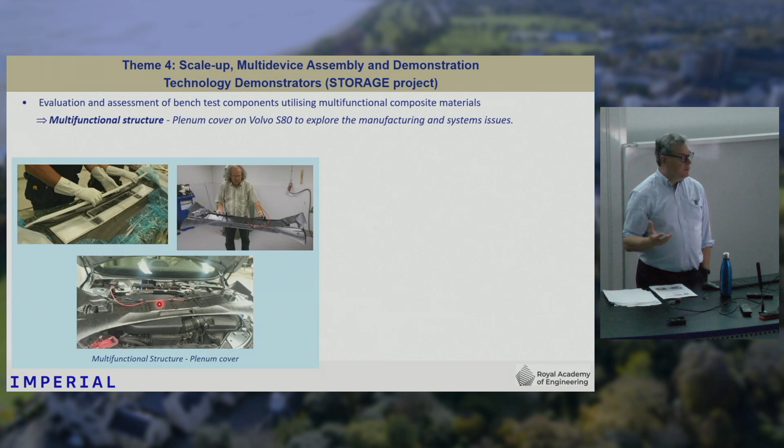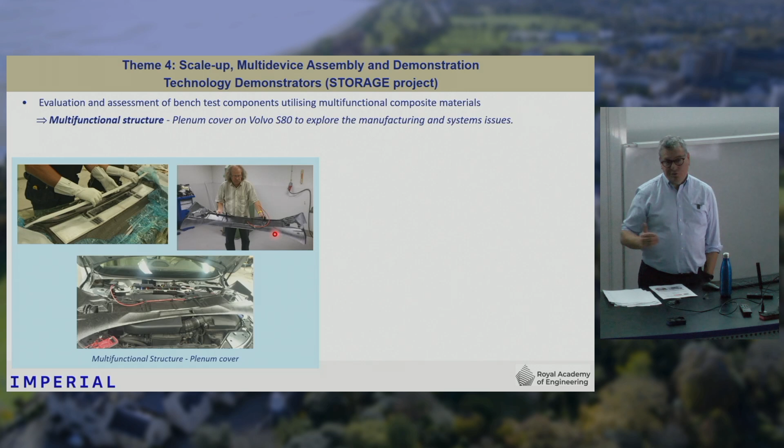Although making this carbon fiber lithium-ion battery hybrid was quite expensive, they recognized that the mass savings, the volume savings, and the energy savings would be significant by going down this route. They were very keen to see this technology in use, so they put it into a car and drove it around Gothenburg for 18 months, and it worked fine. It rains a lot in Gothenburg, so that didn't prove to be an issue, which was something we were worried about originally.

The more advanced aspect we did was we made a boot lid. Again, from a Volvo S80, we made this boot lid component where we incorporated the structural supercapacitors. There were 16 cells into the structure of the boot, so it carried some of the mechanical load and allowed it to power some of the energy systems, like the light in the boot. So this is again this localization of energy storage.

And again, we've got that Imperial project in the lab. It's from 2012, I think, and it still works, which is very encouraging. And then more recently, we had an EU project called Sorcerer, which was focused on an aerospace application.

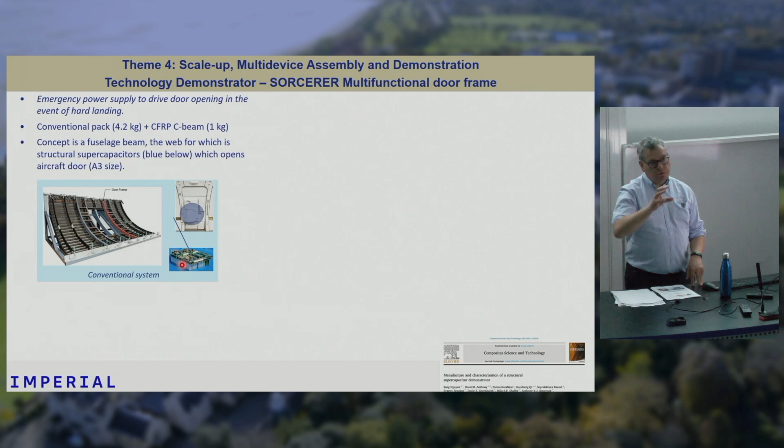So if you get onto an A380, look at the door, there's this big block, and that's a bank of supercapacitors. There's 53 supercapacitors there in case there's a power surge or a heavy landing and the door gets jammed - that supercapacitor bank produces enough torque to force the door open. So it's added weight, and what we thought we'd try to do was make a structural beam, a fuselage beam, using structural supercapacitors to replace that component.

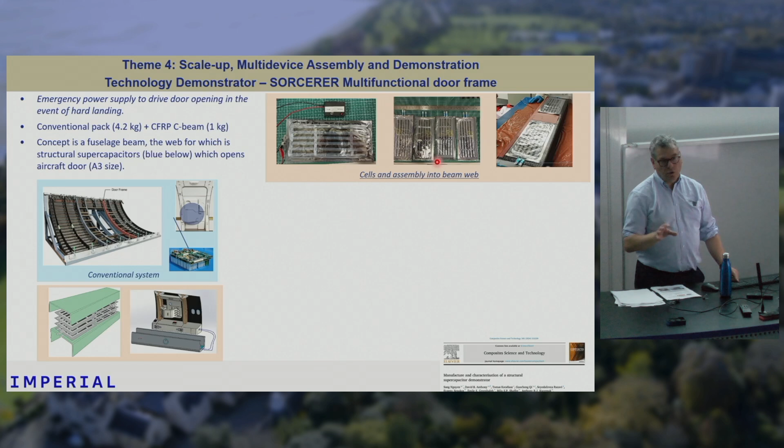So we designed the component, made a little demonstrator as illustrated here - these are the individual cells, and you can see the current collectors on there, but we hadn't solved the encapsulation problem, so they're in these sort of coffee bags, which is the conventional encapsulation solution. And then we built this meter-long C-beam, which includes those structural supercapacitors, and we used that to power this door.

Okay, so I just want to finish off by talking a bit about research strategy, and then talk about the wish list of what I'd like modelers to do to take this technology forward. So see this as an opportunity for areas where we see modelling input is needed to take this technology forward.

In terms of strategy, we've thought a lot about what sectors could take this technology forward. Aerospace I've talked about a lot, automotive and portable electronics potentially. We see a big opportunity with micro-mobility - scooters, e-scooters, e-bikes. Some of the things we've been exploring is could you make the frame of the bike out of our material to drive the GPS and things like that on your bike. So these are transportation, lightweighting aspects.

Medium term, things like robotics, drones, defense - the environment there is a bit more extreme, so higher temperatures, more issues with damage and things. That's probably a medium term focus. And then longer term, we see things like marine, construction, space. A lot of these are really driven by volume of material, so costs become important. And space - one potential issue for this technology is temperature. Batteries don't like being at high or low temperature, and our materials would be the same.

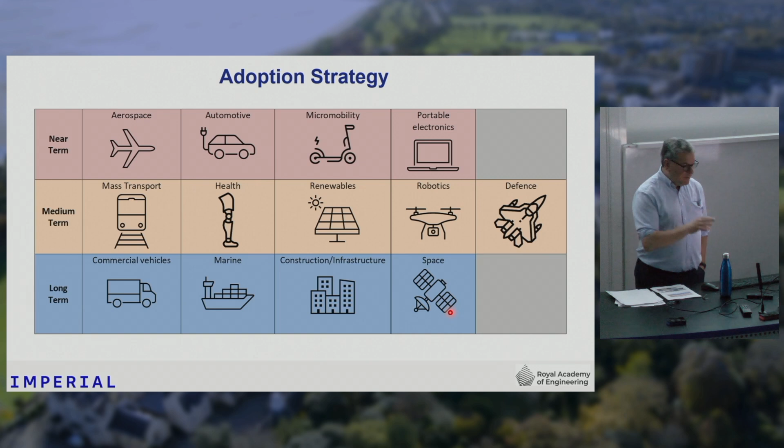But now let me just finish off talking about the themes, the areas that we feel modelers could make a contribution to. Remember this sort of micro, meso, and macro structure to what could be achieved. So I've broken this down into the themes again - there's 4 themes that I spoke about. And first of all, starting on the constituents, we think there's an opportunity for discovery of new multifunctional constituents.

So topology optimization is what we've used already to come up with these microstructures, and we've 3D printed these. We focused on electrolytes, but there could be opportunities for modeling the electrodes too, using topology optimization. For instance, the electrodes need to have very high surface area and carry mechanical loads, so there might be opportunities there for doing multifunctional optimization of that route.

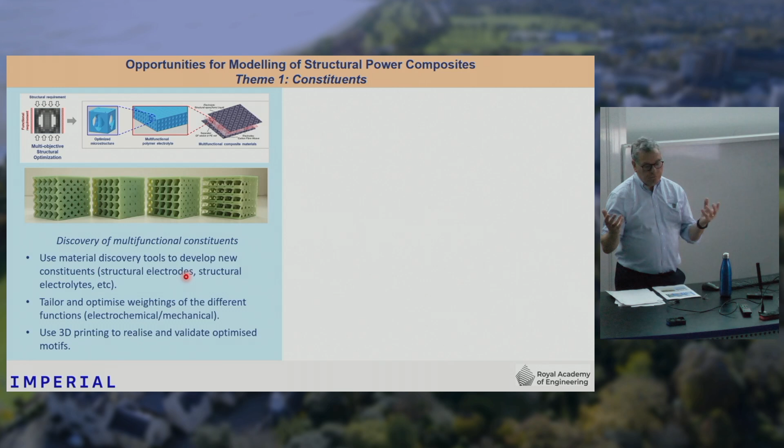And then interfaces - again, the interface needs to carry mechanical load and allow ion transport. So there's an optimization problem there, where you're looking at several conflicting objectives and trying to optimize for those. Opportunities there as well.

And I think there's an opportunity to move away from the planar structure that we have in conventional composites and batteries. Because one thing I feel is we could live with a soft electrolyte if we could have an interface which is not planar. If we have an interlocking interface with a soft electrolyte within that interface, then the actual interlocking of the electrodes could carry the mechanical load, while the soft electrolyte could provide the ion movement. So I think there's opportunities there, perhaps looking at bio-inspired structures - nature tends to use very non-planar structures to make things much more tortuous and provide routes to getting multifunctionality. So that's at the constituent level.

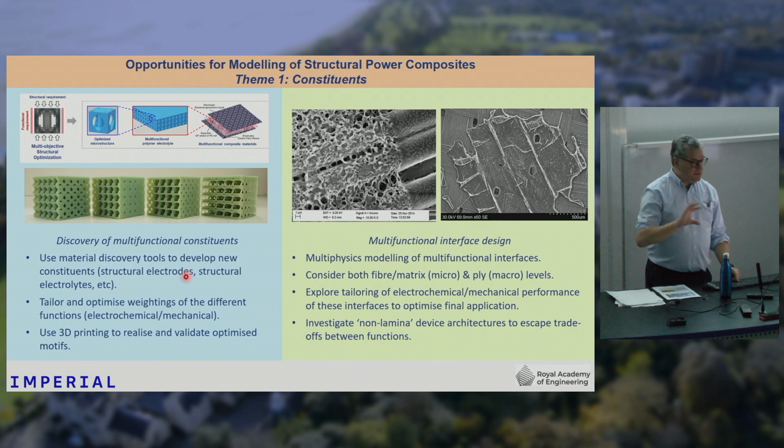I think there's opportunities in process modeling for these materials. We've done a lot of work on mixing the ionic liquids with structural epoxies - other groups have used other types of polymers. The issue there is there's a strong chemical interaction between the ionic liquid and the structural phase, so we're looking at how to optimize that. I think process modeling, flow modeling, and drape modeling are areas that could be useful there.

Modeling new architectures - there is an existing body of work looking at battery modeling and supercapacitor modeling, bringing those together to come up with more challenging device architectures, hybrid ion capacitors, and also the balancing of the cells, so mechanical and electrochemical balancing at the same time.

As I mentioned about protocols, we really need to have a coupled mechanical electrochemical test. This is something that people at KTH had developed at a very small scale - a bundle of carbon fibers in an electrolyte. They took their fibers, applied forces to them while taking voltage measurements or applying voltage to that, and that all had to be bagged in an encapsulation material to stop the electrolyte leaking out. But I think there's opportunities there for using modeling to help inspire the development of a coupled test. In order to develop multifunctional data, we need that sort of coupled test.

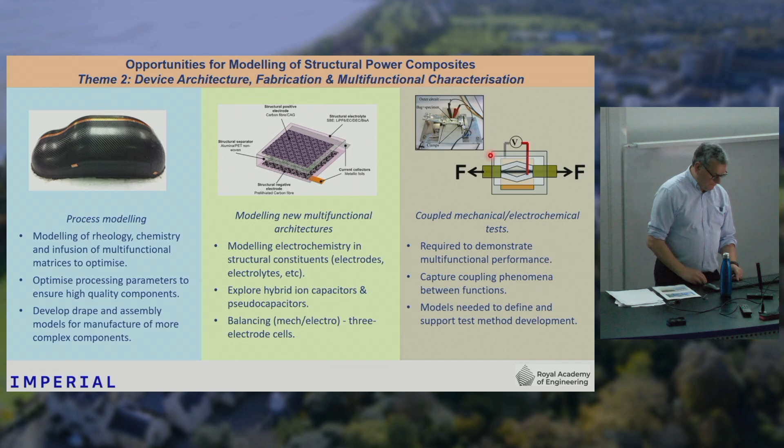Theme 3, on the modeling side, I think there's big opportunities in multiphysics modeling - melding conventional composite models with electrochemical models in a single code. Industry is not going to accept, 'I'm doing my electrochemistry in COMSOL, I'm doing my mechanical modeling in Abaqus.' They want one standalone package that will do everything for them and capture the coupling processes. That's an aspiration - getting those two codes to talk to each other and form one code. That's going to allow us to do elastic behavior, strength prediction, defects and damage. All these things are very mature in composites, but no one's tried to do this in our multifunctional materials.

Ultimately, the delivery of virtual testing and virtual certification tools will be important.

Another thing on the modeling side is the multifunctional design tools. The question is: I've got a multifunctional product, I've got a battery plus a structure - which one is superior? Which one offers the better weight saving? At the moment we have very rudimentary tools for making that comparison, but these need to be advanced. They need to incorporate the predictive models, the multiphysics models, and the life cycle assessment models as well, because the whole point of doing this is to reduce the environmental impact, so we need a life cycle model in there too. That's really going to help us understand how we have ownership of these materials - repair and inspection, and even end of life. Can we recover, can we recycle these devices?

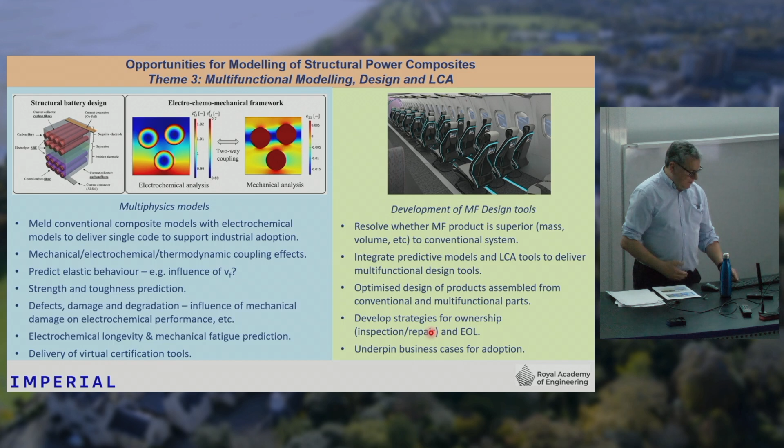The final aspect on theme 4 - I think we've already started working on using modeling to optimize the current collection configuration.

I mentioned about fire, and I think there's opportunities on modeling the chemistry that goes on during fire. My colleague Ajit said I should suggest using fast marching as a methodology for achieving that, although I don't know what it means.

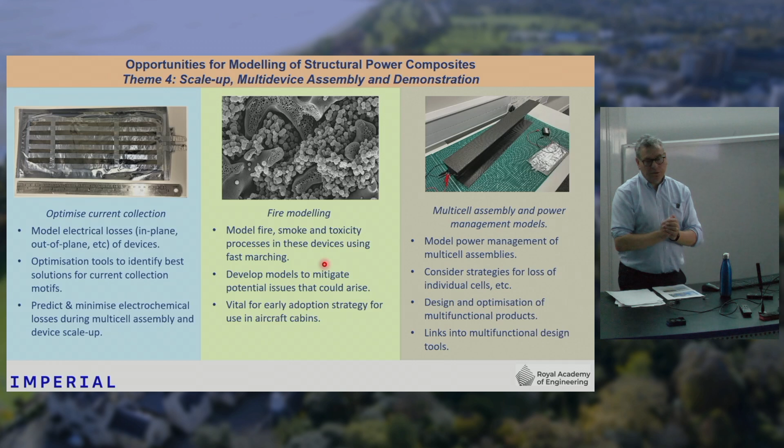We need to address this from the point of view of getting this material into cabins, and also modeling of multi-cell assemblies. If you make a single device, you can characterize that, but ideally a single device is not going to be enough in a final product. In aerospace, we want to achieve about 24 volts minimum in our product, so we would be looking at using about 10 cells. But what if those cells are slightly different in their performance, or one of those cells dies partly through its life? How do we design our component? Again, opportunities for modeling with that, I think.

Okay, so I'm just going to finish now and run through what I've covered. This is a really exciting technology. Having come from a composite background, the downside of working in this area is I find composites quite dull now when I go back to looking at that other research that I do.

It's trying to bridge these very disparate fields - we're trying to work with electrochemists and composite mechanics people, and that is really interesting to be in that space. The devices are getting good performance - we're kind of at TRL 3 or 4 at the moment with this technology. But there are some things we still need to do. We need to deal with the interfaces and the electrolytes, develop protocols for characterizing and reporting these materials, and deal with current collection, encapsulation, and the predictive tools as well.

So we kind of see aerospace as the key aspect that we can focus on here, in auxiliary applications rather than powering the aircraft.

We really think this is such a simple idea. Having a material that does two things at the same time is clearly going to offer benefits, and as engineers it offers us design freedoms as well. So we feel it's a case of when this happens rather than if it's going to happen. We think in 5-10 years, we will be using structural power materials in our products.